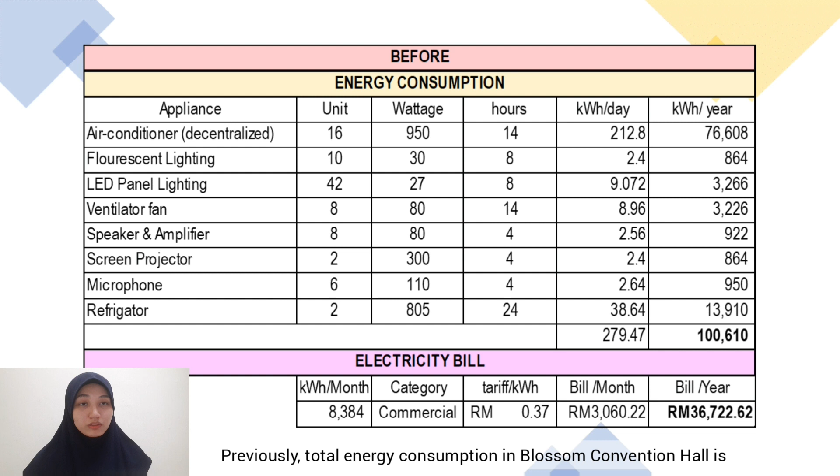Firstly, we will go through cost comparison based on energy efficiency. Previously, total energy consumption in Blossom Convention Hall is 100,610 kWh per year, with use of electrical appliances which are decentralized air conditioner or room air conditioner, ventilator fan, fluorescent lighting, LED panel lighting, refrigerator, and audiovisual system equipment.

Electrical appliances that consume most energy is room air conditioner with 76,608 kWh per year. Total electricity bill per year is 36,722.62 ringgit, with the TNB tariff for commercial category at 37 cents.

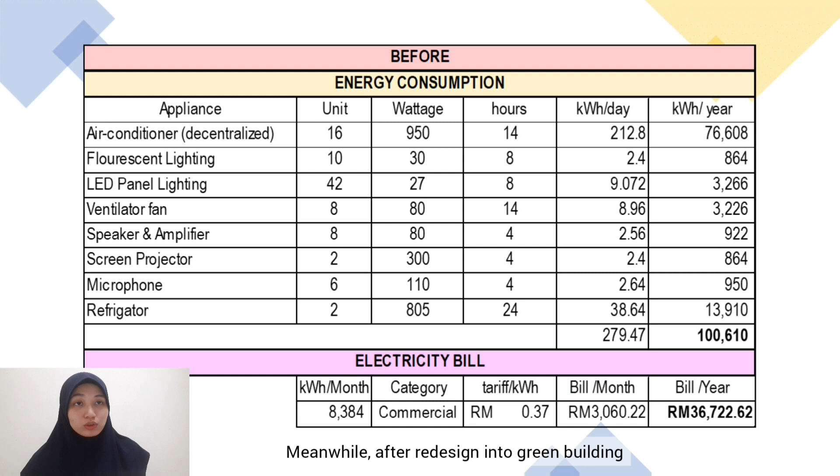Meanwhile, after redesign into green building based on Green RE specification, energy consumption per year is estimated at 44,977 kWh per year. Electricity bill also reduced to 16,416.59 ringgit per year using the same previous TNB tariff.

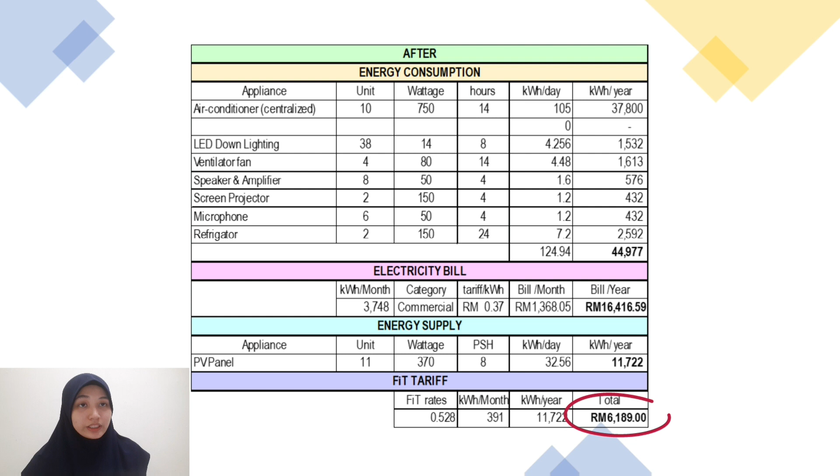Energy supply from 11 PV panels with 370 watt each are estimated at 11,722 kWh per year. Based on SEDA, renewable solar energy gain can be sold using feed-in tariff at 53 cents. Totaling out, from energy supply, 6,189 ringgit can be gained by selling this solar renewable energy.

In comparison, differences of energy consumption before and after green design is 55,633 kWh per year, with 55% of improvement. Huge differences is due to replacement of room air conditioner or decentralized air conditioner into centralized air conditioner.

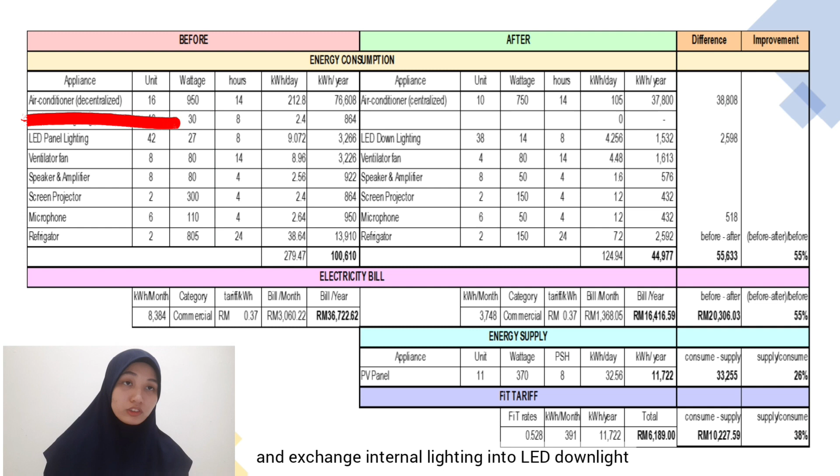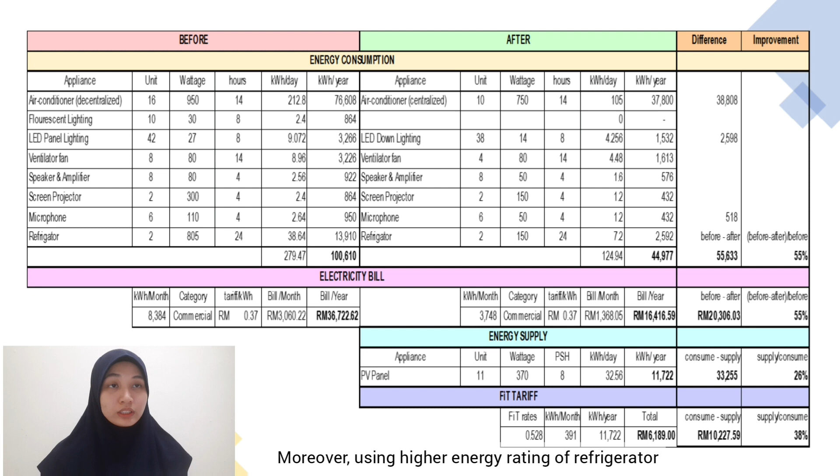Besides that, removing fluorescent lighting and exchanging all internal lighting into LED downlight also saves as much as 2,598 kWh per year. Moreover, using higher energy rating of refrigerator reduces energy consumption as much as 11,318 kWh per year. Besides that, electricity bill is lower compared to before greening.

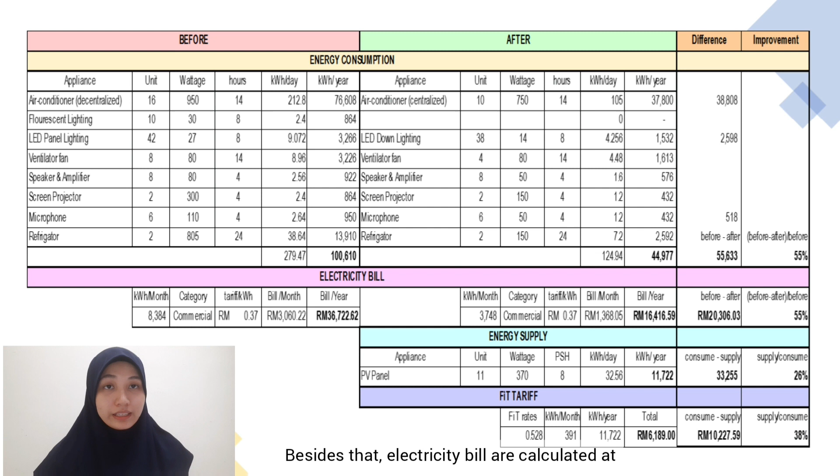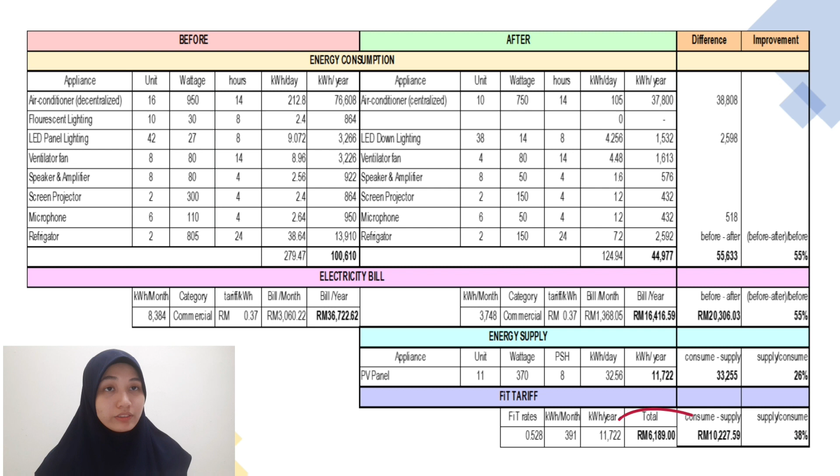Electricity bill is 20,306.03 lower compared to before greening. Energy supply gain can be sold at 6,189 ringgit, which means lesser pay for electricity bill at 10,227.59 per year, and that is 38% of improvement.

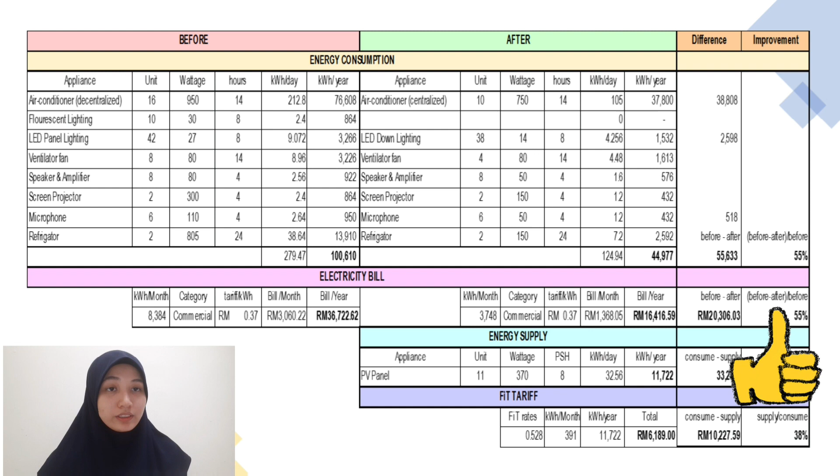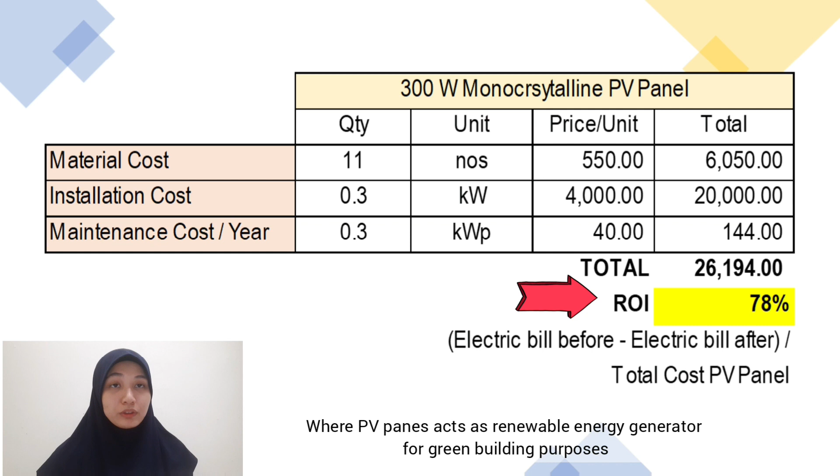Initial investment spent to achieve green design building are as follows. 300 watt of 11 monocrystalline PV panels are estimated at 26,194 ringgit per year. ROI calculated for PV panels is 78%, where the PV panels act as renewable energy generator for green building purposes.

Besides that, to improve ventilation and natural lighting of Blossom Convention Hall, solar control windows are installed with total cost of 27,410.82 ringgit. ROI calculated for solar control window is at 52%.

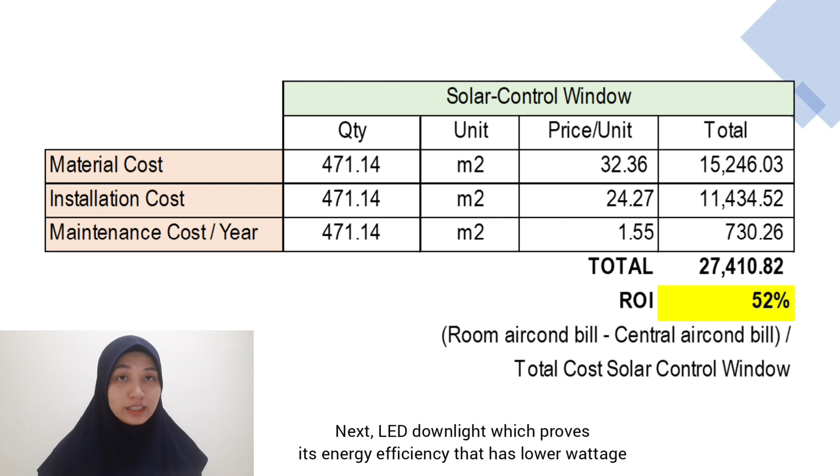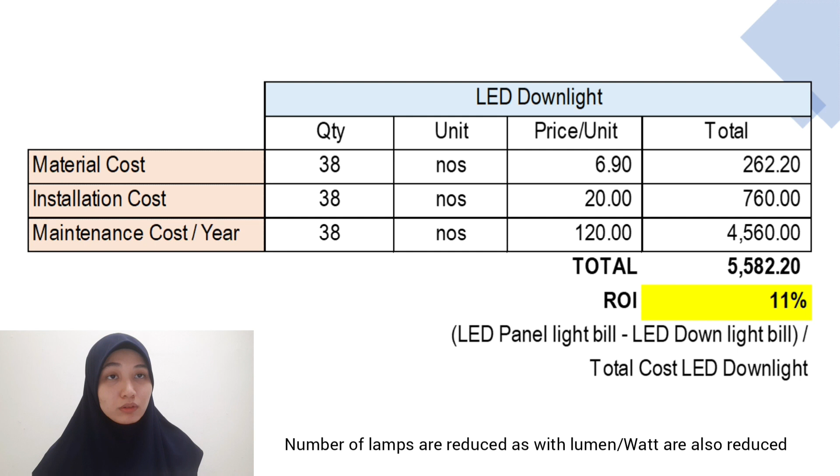Next, LED downlight, which proves its energy efficiency that has lower wattage compared to previous type of lighting, estimated total cost of 5,582.20. Number of lamps are reduced, as with lumen per watt also reduced at 2.71. ROI calculated for LED downlight is at 11%.

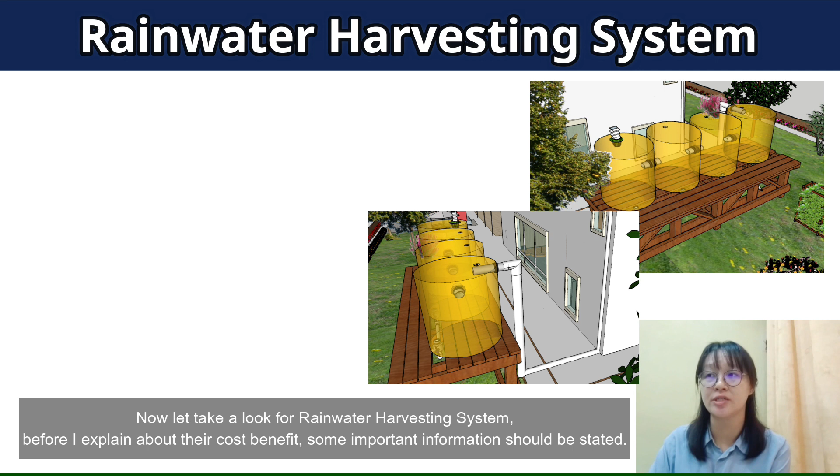Now, let's take a look at rainwater harvesting system. Before I explain about their cost benefit, some important information should be stated. First, the rainwater harvesting system will save about 35% of water, which 25% is from the toilet flushing, 10% is from the gardening. Second, the size of one water tank is about 300 meter cube, and our hall has 4 water tanks. Thus, the total size is about 1,200 meter cube.

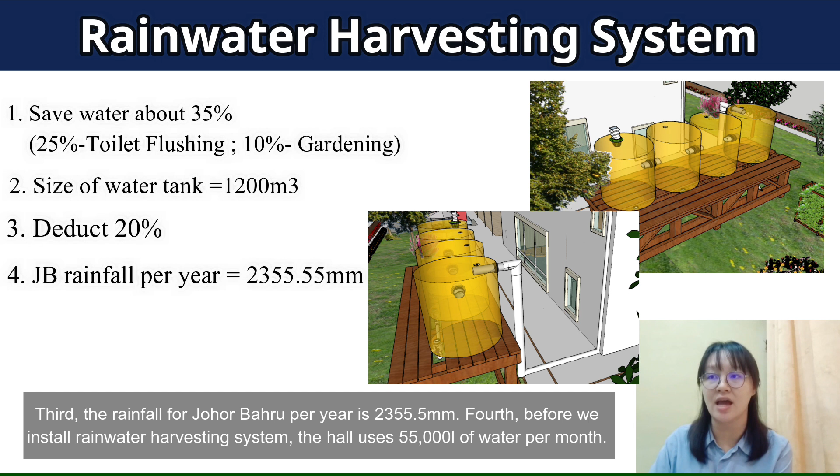Next, before we know how much water we'll collect from the rainwater harvesting system, we need to deduct about 20% because not all the water will get into the toilet tank. Third, the rainfall for Johor Bahru per year is about 2,355.5 mm. Fourth, before we install rainwater harvesting, the hall used 55,000 liters of water per month.

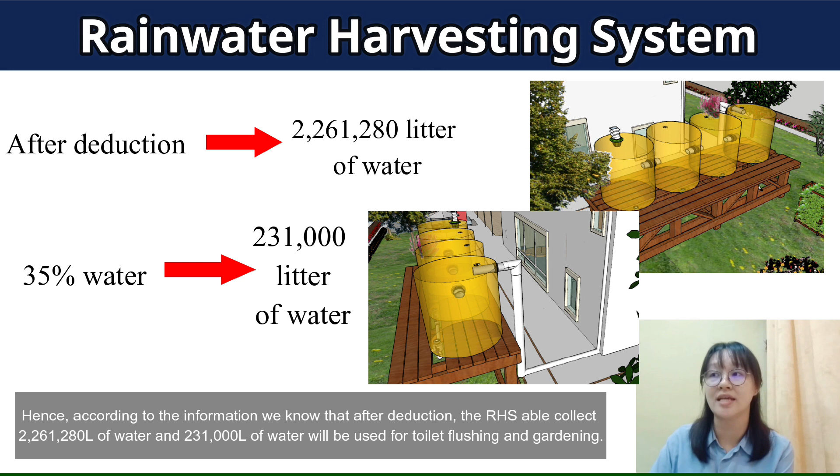Hence, according to the information, we know that after deduction, the rainwater harvesting system will collect about 2,261,280 liters of water, and 231,000 liters of water is used for the toilet flushing and gardening.

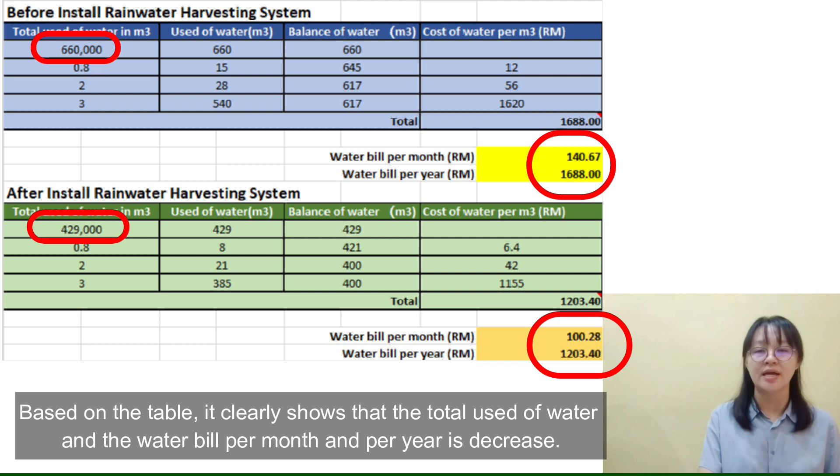The table shows the cost of water per meter cube before and after installing the rainwater harvesting system. Based on the table, it clearly shows that the total use of water and the water bill per month and per year is decreased. The total use of water is decreased from 660,000 meter cube to 429,000 meter cube per year. Moreover, the water bill also decreased about 40 ringgit 39 cents per month after installing the rainwater harvesting system.

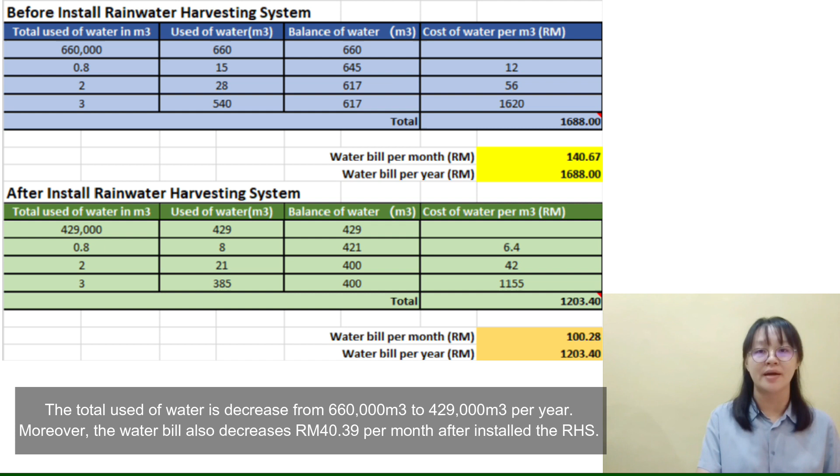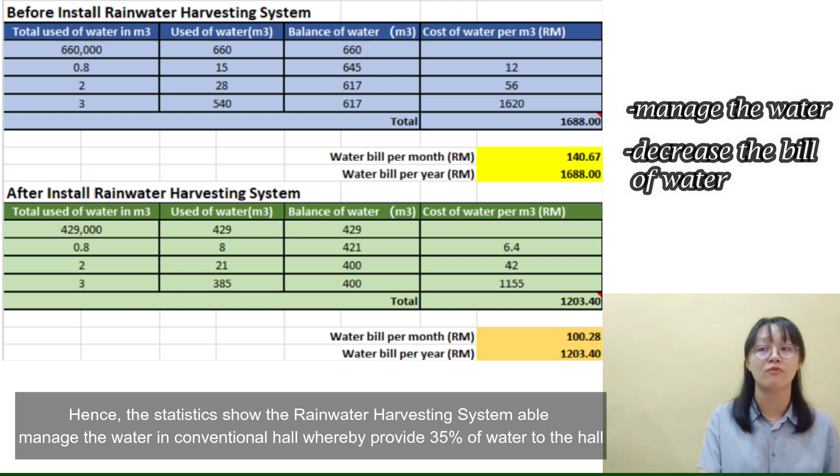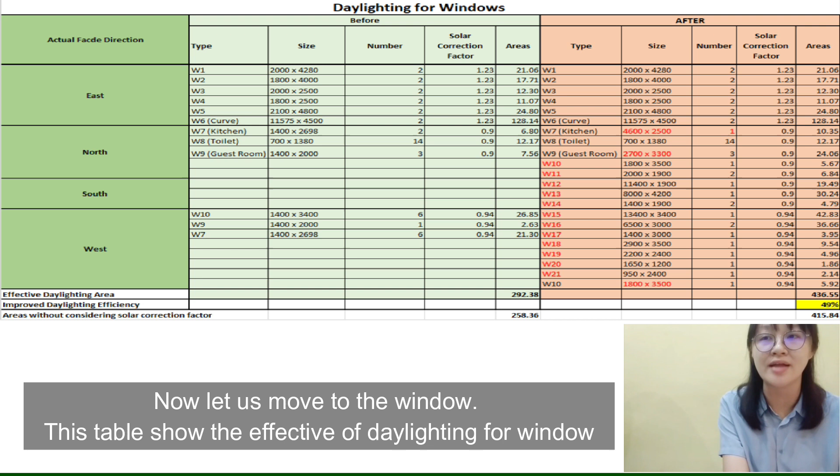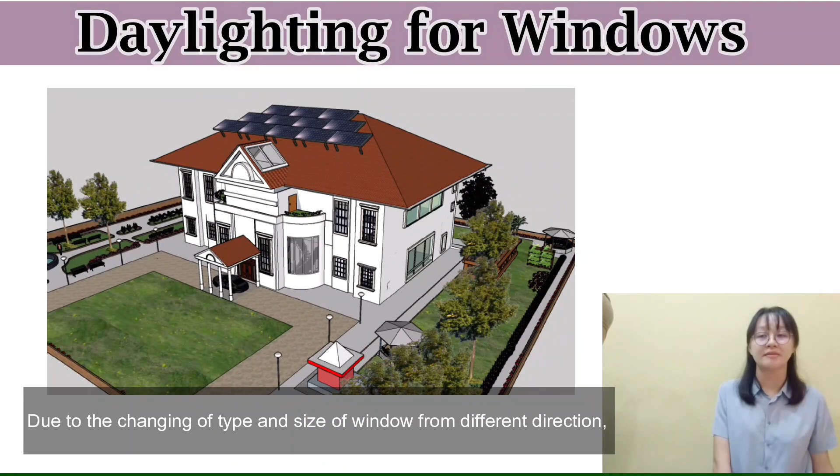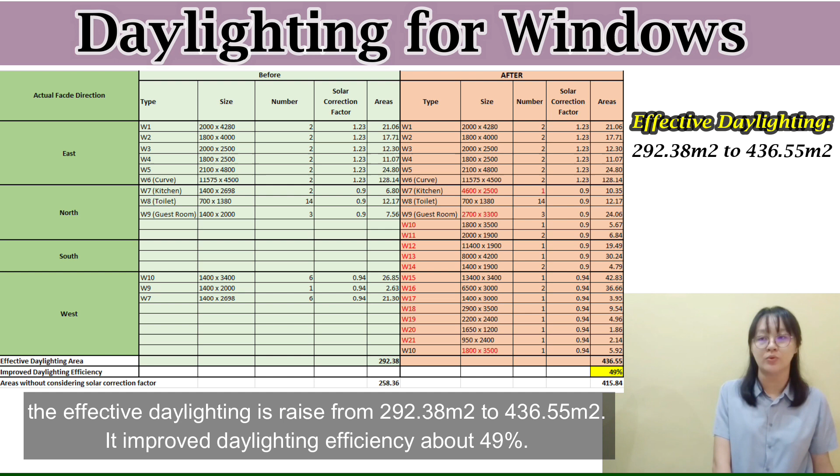Now, let us move to the window. This table shows the effective daylighting for the window. As you can see, the window faces from the east, north, south, and west direction. Due to the changing of the type and size of the window from different directions, the effective daylighting is raised from 292.38 meter square to 436.55 meter square. It improves the daylight efficiency about 49%.

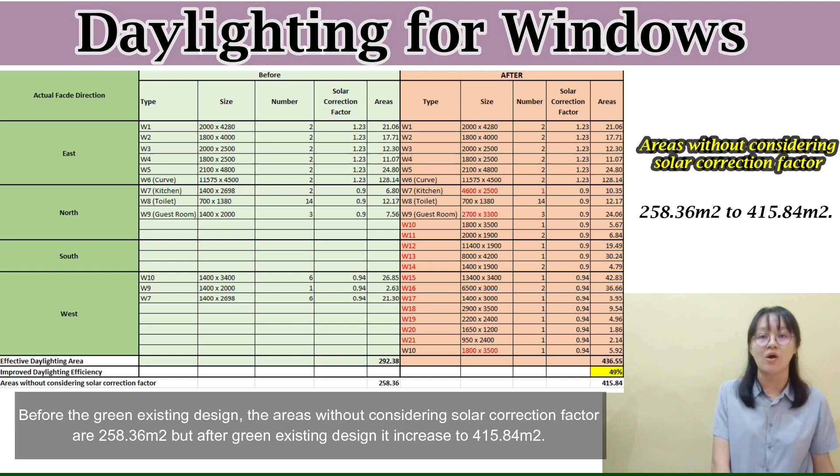Before the green assisted design, the area without considering solar correction factor was 258.36 meter square, but after green assisted design, it increased to 415.84 meter square. The U value of window also improved from 3 watt per meter square Kelvin to 1.2 watt per meter square Kelvin.

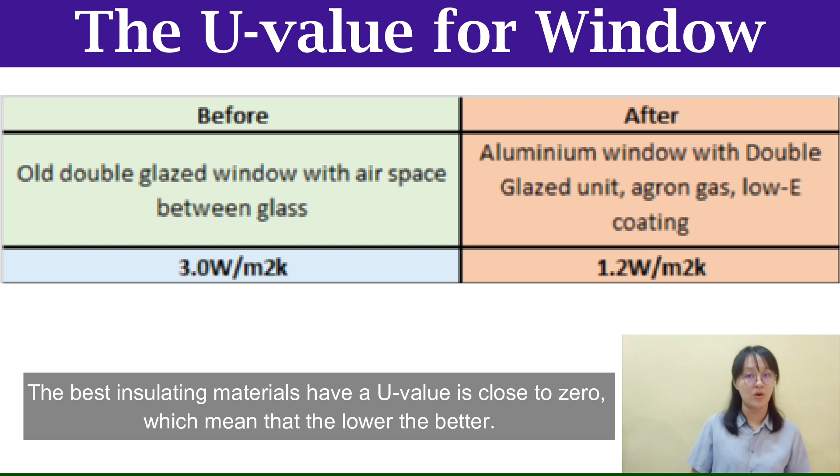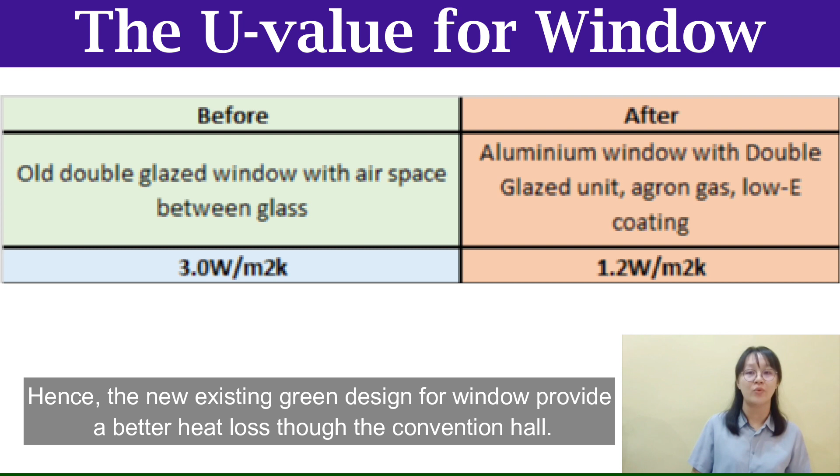As we know, the U value signifies the heat loss through a given thickness of a particular material. The best insulating material has a U value close to 0, which means the lower the better. According to the references, the maximum U value for the window is 1.6 watt per square meter Kelvin. Hence, the new existing green design for window provides a better heat loss through the convention hall.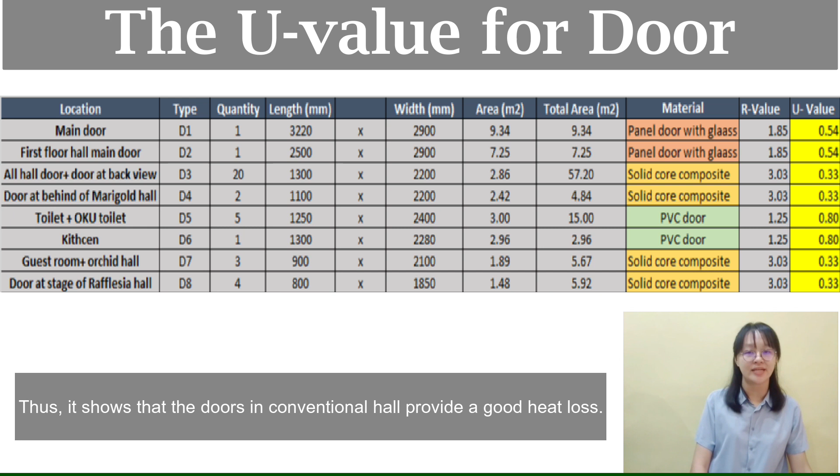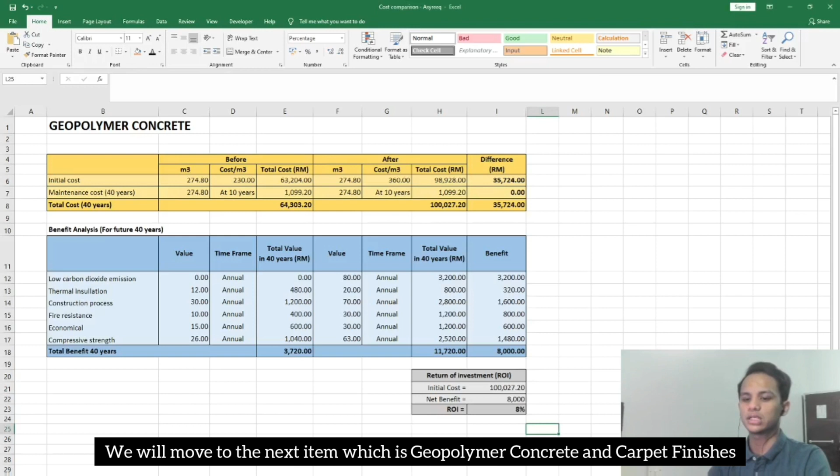This table shows the U value for the door. Based on the table, the U value for the door is close to 0. Thus, it shows that the door in the convention hall provides a good heat loss. Next, we will move to the next item, which is geopolymer concrete, and the next one is carpet finishes.

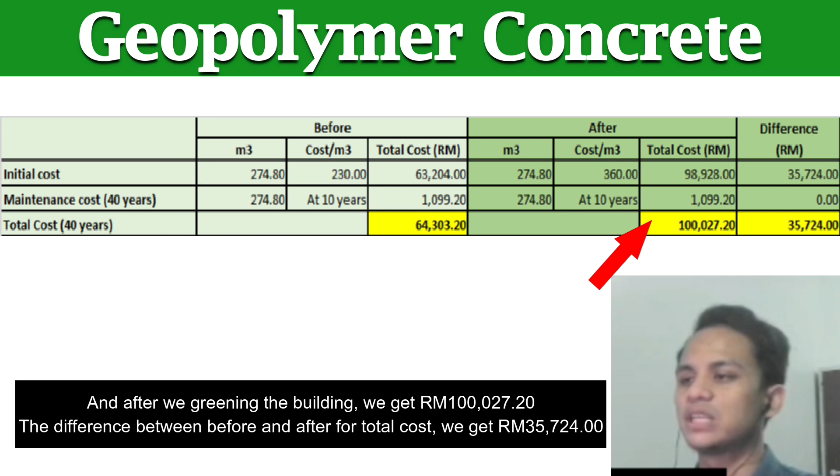For geopolymer concrete, as you can see in this table, before greening the building we get 64,303 ringgit and 20 cent. After we use geopolymer concrete, we get 100,027 ringgit and 20 cent.

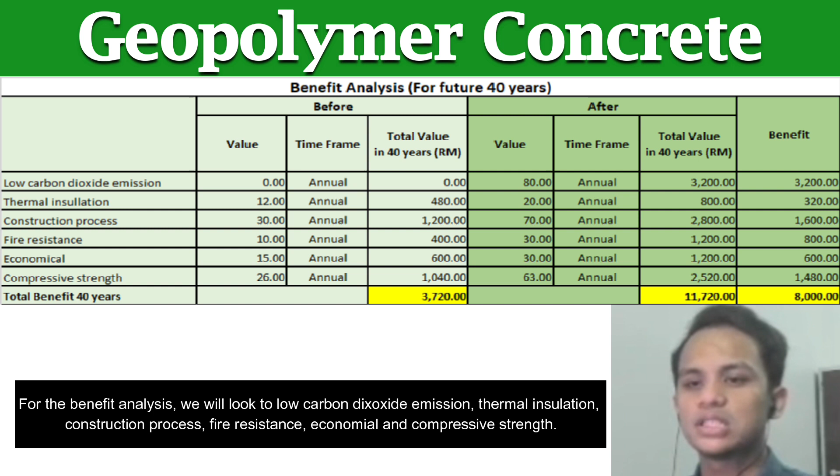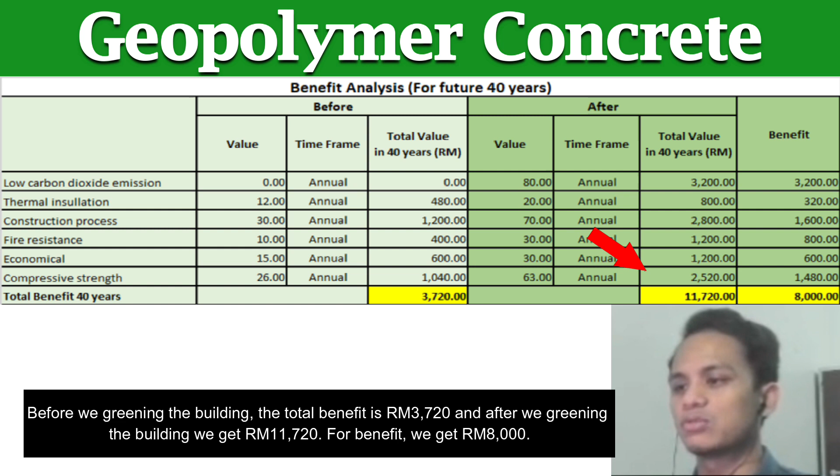The difference between before and after for the total cost is 35,724. For the benefit analysis, we look at low carbon dioxide emission, thermal insulation, construction process, fire resistance, economical, and compressive strength. Before greening the building, the total benefit is 3,720, and after greening the building we get 11,720. So for the benefit, we get 8,000.

For the return of investment, or ROI, the initial cost is 100,027 ringgit and 20 cent, and the net benefit is 8,000. The ROI for this item is 8%.

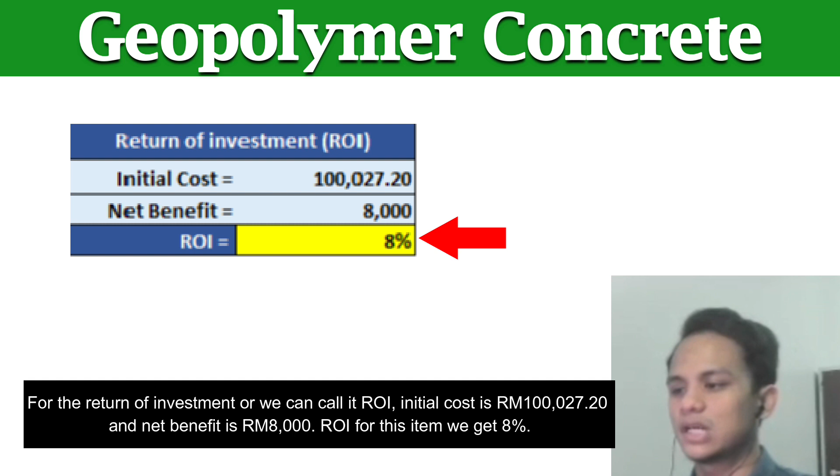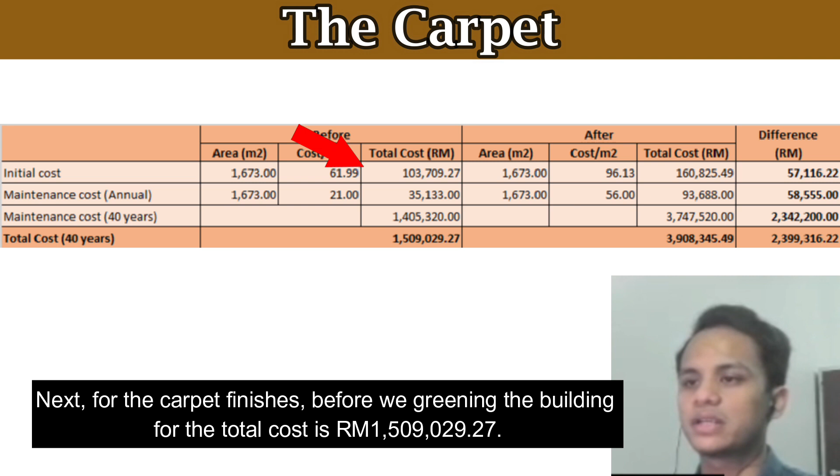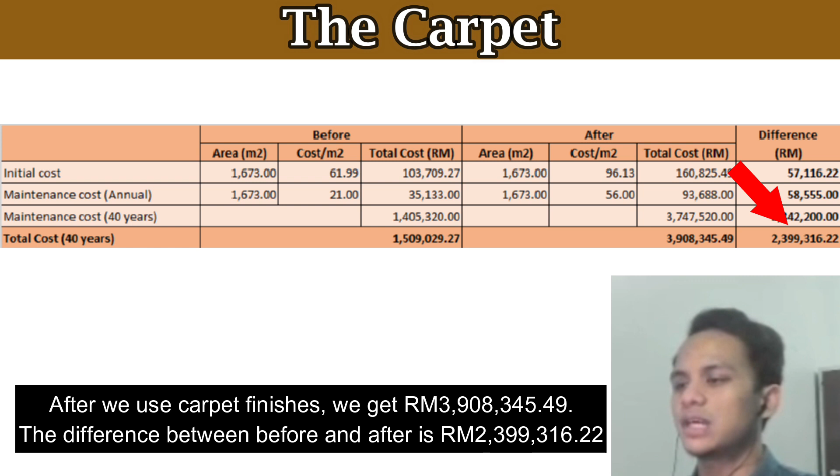Next, for the carpet finishes, before greening the building the total cost is 1,509,029 ringgit and 27 cent, and after using carpet finishes we get 3,908,345 ringgit and 49 cent. The difference between before and after is 2,399,316 ringgit and 22 cent. For benefit analysis, we consider increased safety, energy, help in healthcare, easier to maintain, and recyclability.

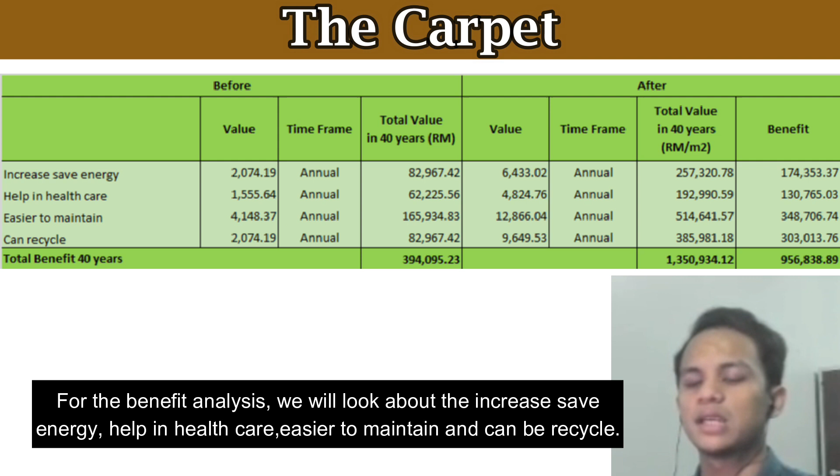Before greening the building, the total benefit is 394,095 ringgit and 23 cent, and after greening, the total benefit is 1,350,934 ringgit and 12 cent.

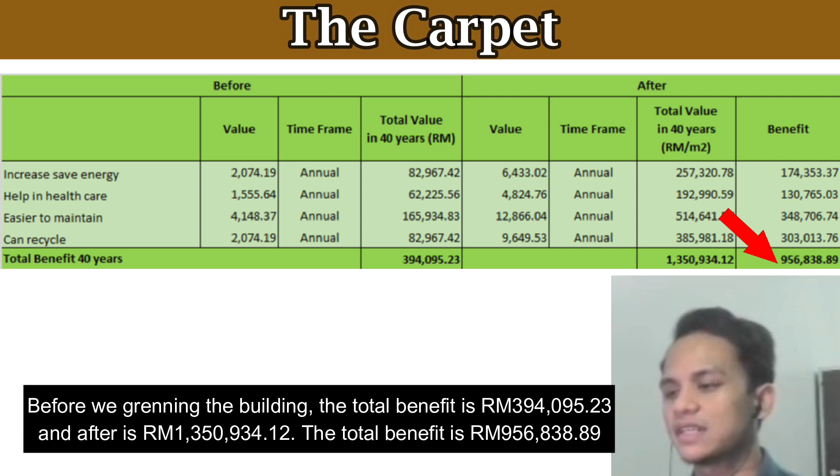We get a net benefit of 956,838, and for the ROI we use the formula net benefit divided by initial cost. For carpet finishes, the ROI is 24%.

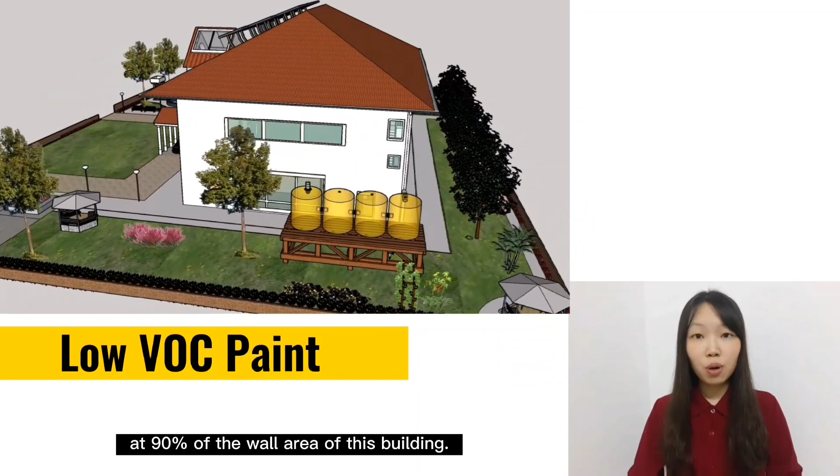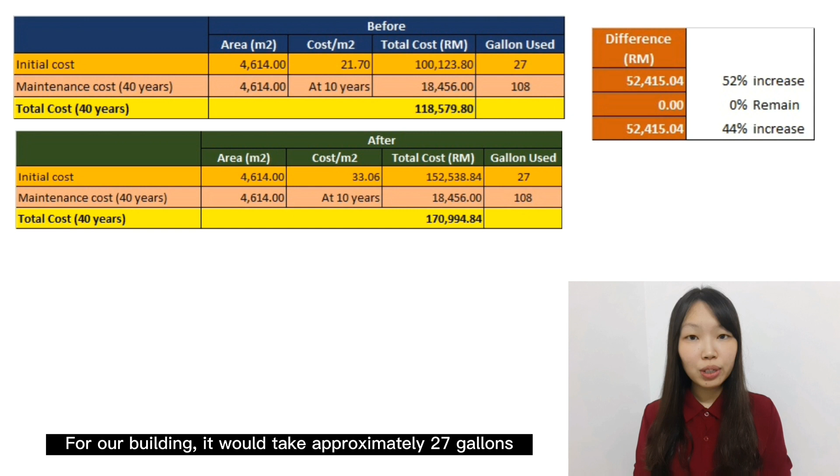Next, we replaced the traditional paint with low VOC paint on 90% of the wall area of this building. This increased the cost per meter square by around 52%, from 21.7 ringgit to 33 ringgit. For our building, it would take approximately 27 gallons of paint to cover 4,614 meter square of wall area.

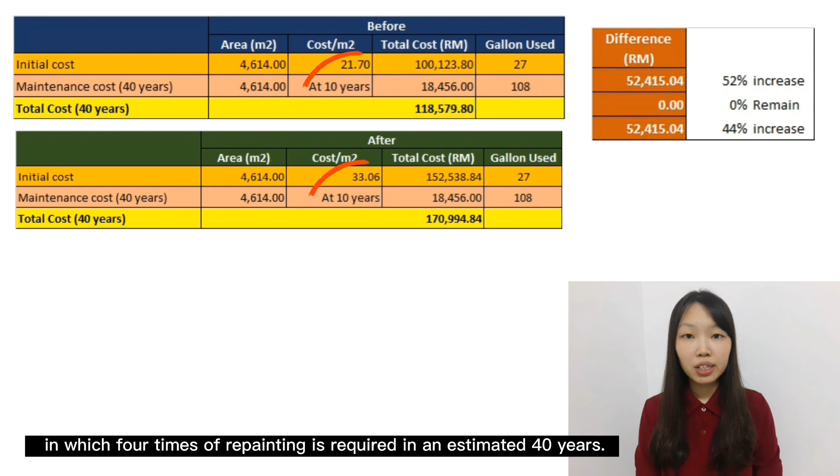We estimated cost and benefit over 40 years. The maintenance cost, such as repainting, is required every 10 years, meaning 4 times of repainting is needed over an estimated 40 years.

Although the maintenance cost does not differ much before and after, it has a great bonus on the environment. Reducing VOC emissions will produce a benefit value of 18,200 ringgit per ton. Over 40 years, it will require 108 gallons of paint.

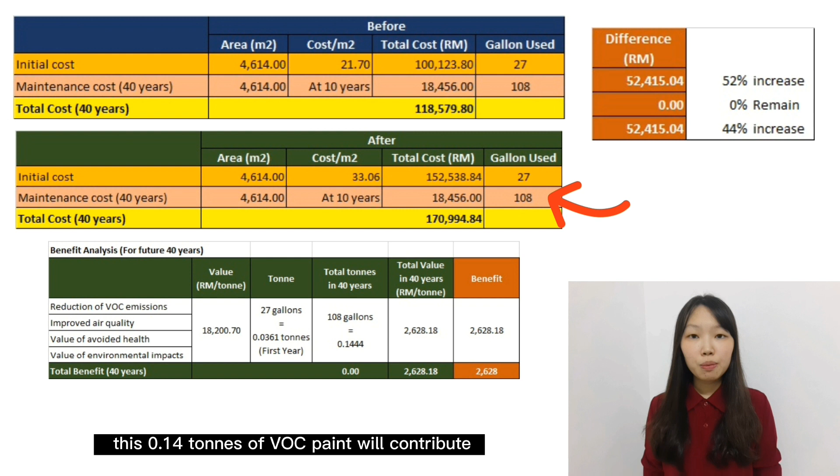This 0.14 tons of low VOC paint will contribute to a benefit value of 2,628 ringgit, and it may bring 2% return of investment.

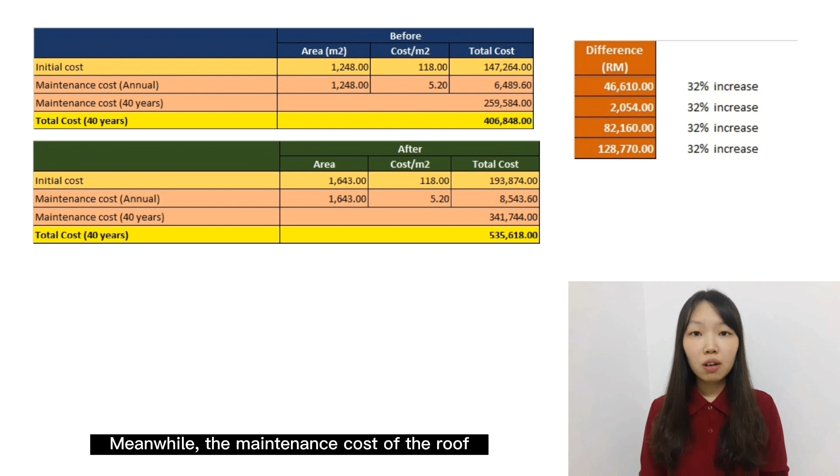In addition, we increased our roof area from 1,200 meter square to 1,600 meter square to provide external shade to the building. The cost of the roof increased 32% with the same rate, while the maintenance cost of the roof also increased by 2,054 ringgit annually.

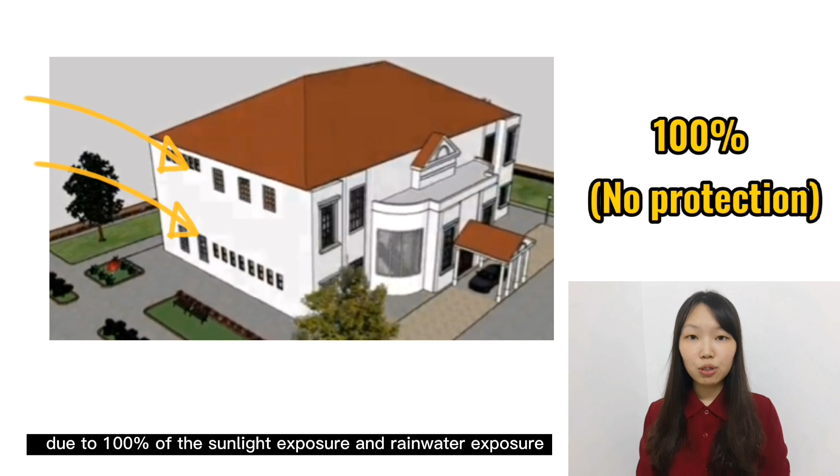Before this, it required repainting the external wall every 5 years due to 100% sunlight and rainwater exposure throughout the year. After increasing the roof area, it provided 50% protection from sunlight and rainwater, resulting in a 32% reduction in maintenance cost as the lifespan of the exterior increased.

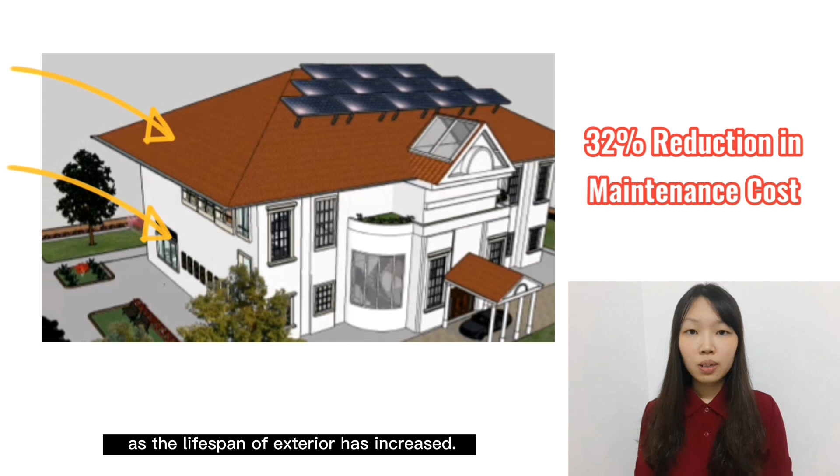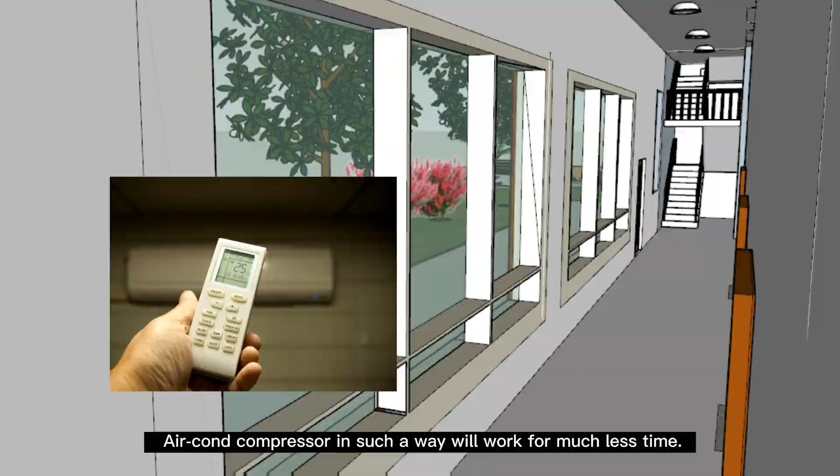Besides that, the reduction in sunlight exposure will also reduce electrical bills. When the indoor temperature decreases, it doesn't need to run air conditioning all day and can be set at a higher temperature. The aircon compressor will work for much less time, leading to less power consumption.

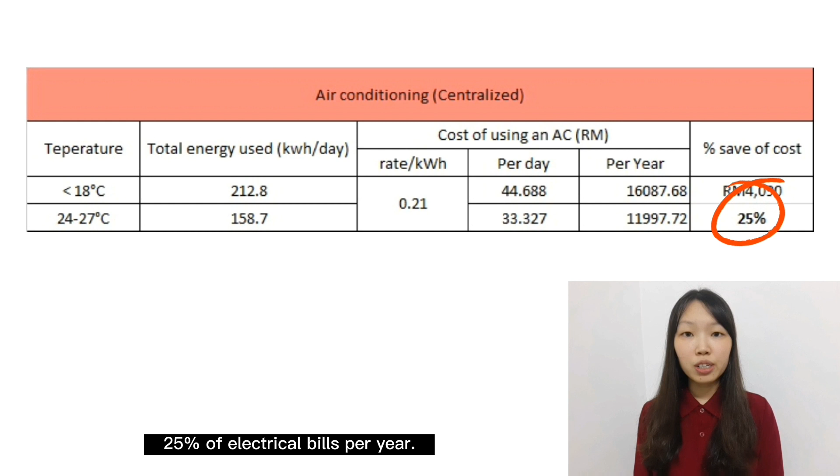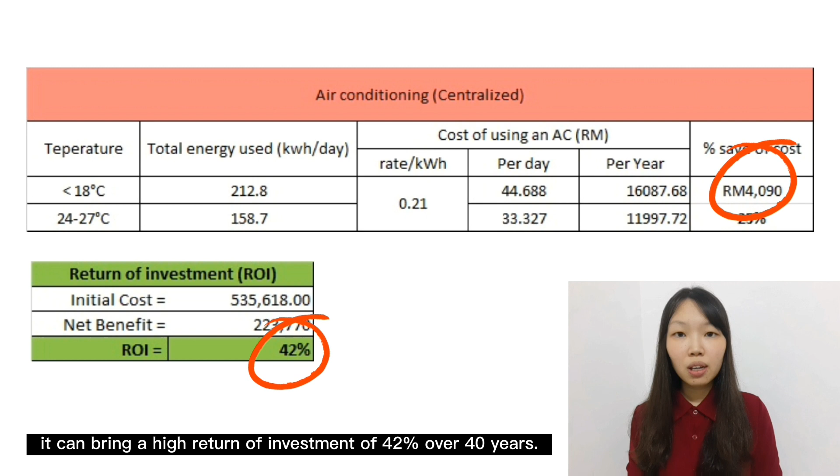Based on this table, it can save around 25% of electrical bills per year. This wider roof is profitable because it can save around 4,090 ringgit on electrical bills, and it can bring a high return of investment of 42% over 40 years.

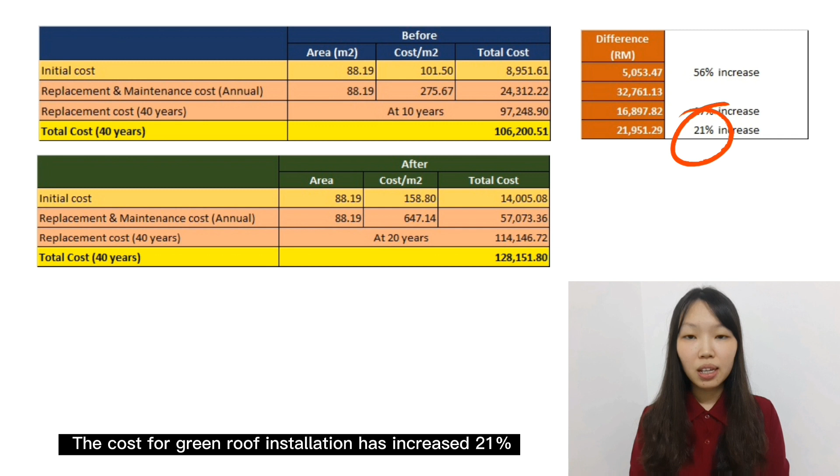Aside from that, we also installed a small green roof above the lobby. The cost for green roof installation increased by 21%, which was 21,951 ringgit for the expected 40 years, including maintenance cost. The green roof has been shown to double the life expectancy of the roof before.

But the green roof is more expensive to replace and maintain than the previous roof. Therefore, it increased the cost of replacement and maintenance by 17%.

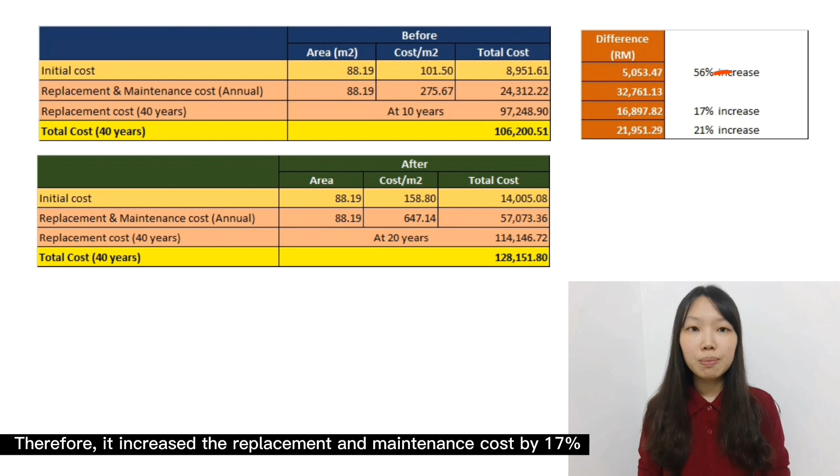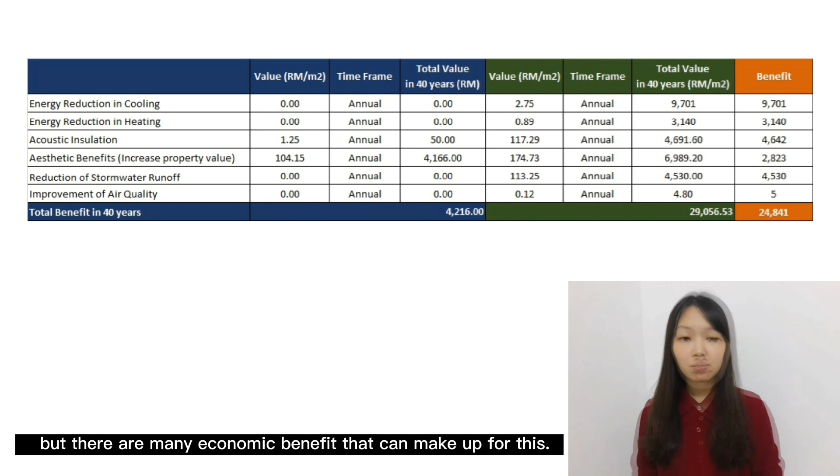Although installing a green roof usually involves higher upfront costs than a previous roof, there are many economic benefits that can make up for this. We estimated the total benefit for the green roof was 29,000 ringgit, and it can bring 19% ROI over 40 years.

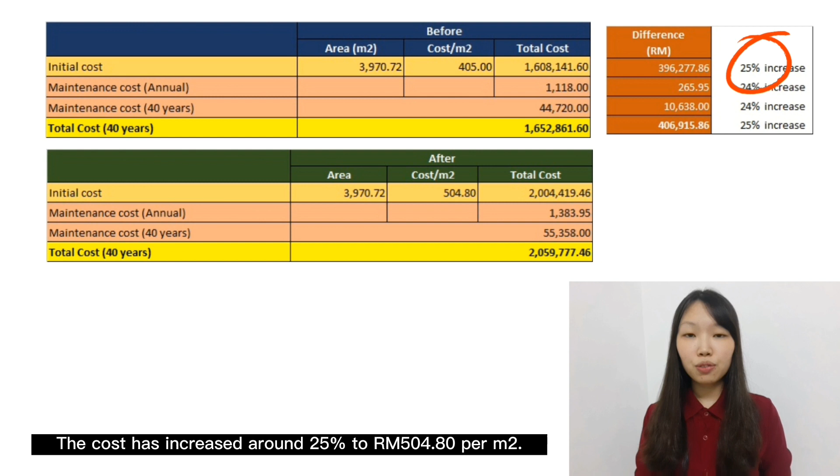Moreover, we have planted more trees to increase air quality and provide shade to the building. The increase of the softscape will result in an increase in cost, which has risen around 25% to 500 ringgit per meter square.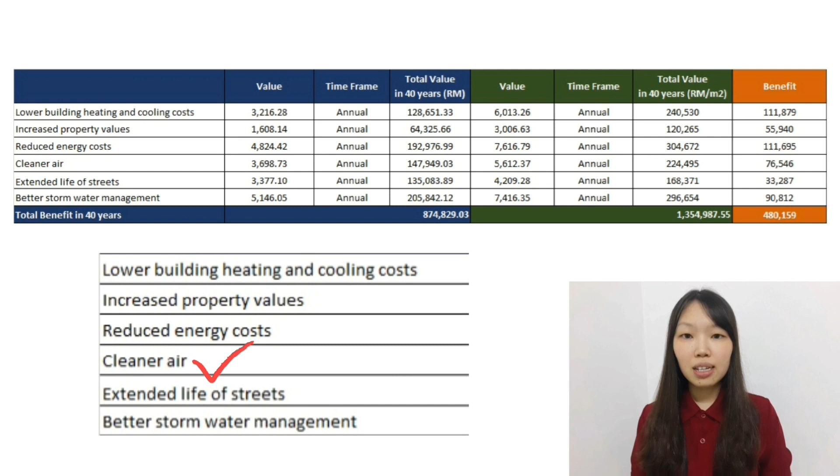Meanwhile, the maintenance cost for landscaping will also increase. Based on this table, landscaping may lower building heating and cooling costs, improve property values, reduce energy costs, provide cleaner air, extend the life of streets, and improve stormwater management.

Over its estimated lifespan of 40 years, the landscaping will bring around 480,000 ringgit, of which nearly 50% is benefit, and the ROI of the landscaping was 23% over 40 years.

In conclusion, after greening the existing design, the total cost increased from RM 4,245,065.7 to RM 5,359,532. Besides, the net benefit for the convention hall is about 929,403.7.

The ROI for the convention hall over 40 years is about 21.89%, and the payback period for the convention hall is 33 years.